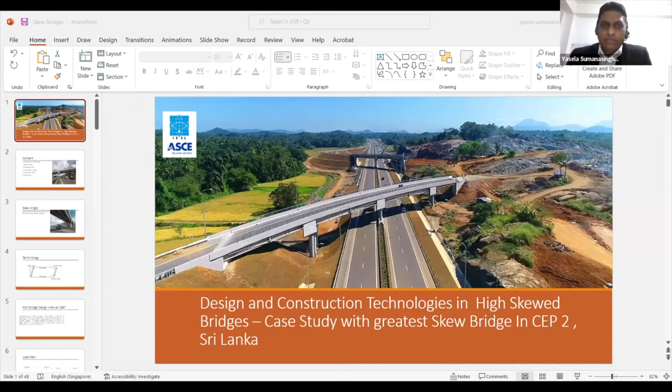Now you see in this photo the Pothuhera interchange, which has two ramps, and these are about nearly 55 degrees skewed bridges, one is ramp A and the other one is ramp D. So this is a system interchange. What do you mean by system interchange is that this is an interchange where one expressway connects to another expressway, but there are no exit or entrance points, direct exit or entrance points, for normal traffic. It's just changing from one expressway to another expressway.

So as we all know, as Sri Lankans, the Meerigama to Kurunegala Section 2 Central Expressway was successfully completed and it's open for traffic presently as well. And Section 3, from Pothuhera to Galagedara, from this interchange point to Galagedera, is under construction, directly managed by the Road Development Authority and local contractors. So that part is ongoing.

So today I'm going to discuss about skewed bridges explicitly, with the case study being the Pothuhera interchange in the Central Expressway project.

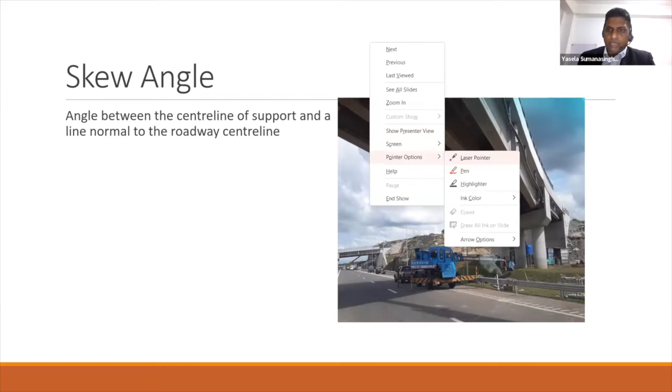So what do you mean by a skew angle in a bridge? It is defined as an angle between the center lines of the support. If you see, check pointer options - yeah, I hope you can see my laser pointer so I can show you what I mean by these terms. The skew angle is the angle between the center line of the supports.

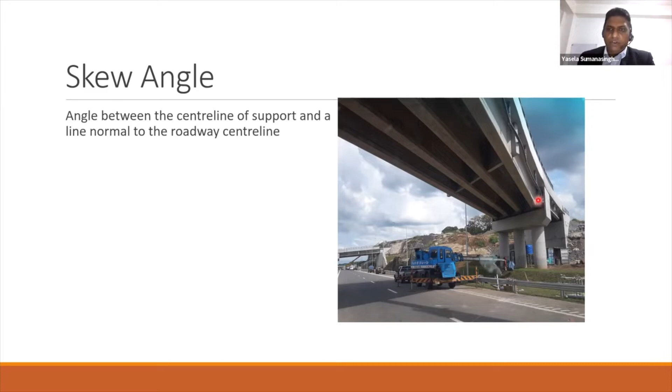This is the support of the skew bridge, and the line normal to the roadway center line. This picture is from underneath the bridge, not from the top. This is the center line of the bridge, and this is the line joined by the supports of the bridge. When you draw a line perpendicular to the longitudinal axis of the bridge, the angle formed by these two lines creates the skew angle.

Now we have a definition in the RDA bridge design manual in Sri Lanka. There is no other local design specification for bridge design other than the bridge design manual developed by the Road Development Authority in 1997. Since there is no other code or guideline other than codes of practice like BS 5400 or Eurocode, we rely on the bridge design manual for local conditions.

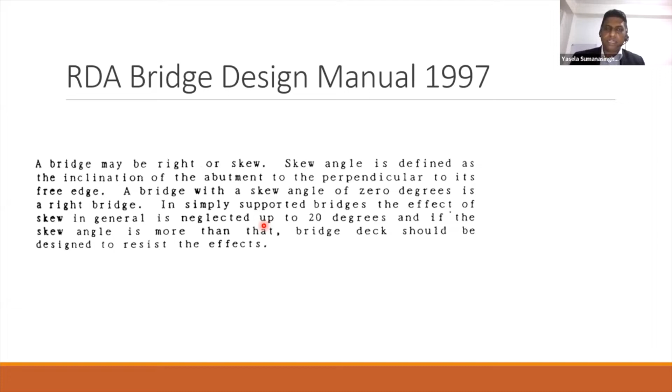So RDA gives this 20 degree limitation. If you look at other codes of practice or design guidelines given by other highway agencies, say UK or Australia, this value is somewhat different - it varies from 20 to 30. Some American standards say it's 30, and Australia sticks to 20. So it ranges from 20 to 30, but in Sri Lanka we stick to the 20 degree margin.

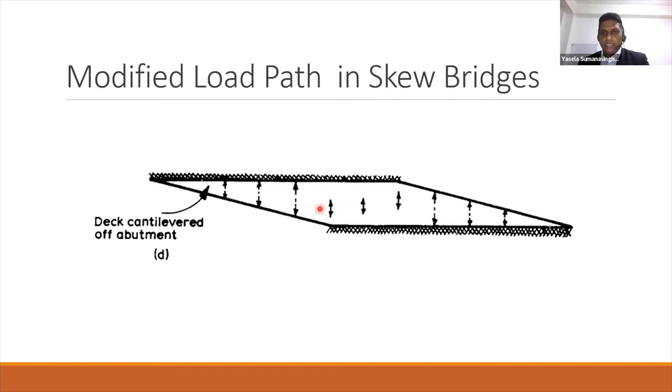Now this is another illustration of what is going to happen due to the skewness. There will be an uplift in the acute corner, and there will be high shear forces at the obtuse corner, and also reaction forces at the obtuse corner. Now this happens due to the load path we have discussed here. So all the loads are transferring to these obtuse corners.

As a result, there will be a high reaction in the obtuse corner, and load transferring to the acute corner is less, so shear forces are less, and perhaps there may be an uplift and lesser reaction forces at the acute corner. So these are the load paths clearly defining what is happening. So if you have a skew deck with less torsional distribution system, you can see that will happen in the deck.

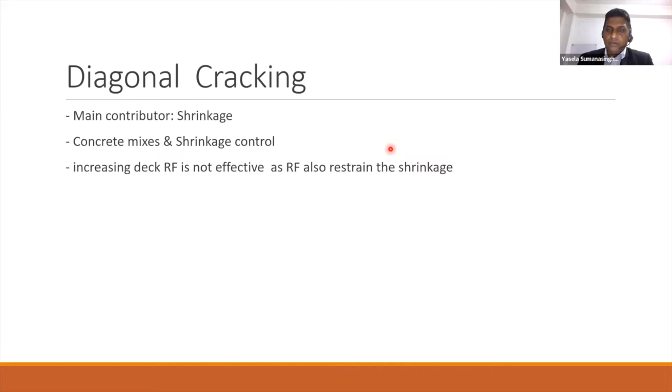The research papers say most of the cracks that appeared in skew bridge decks were due to shrinkage in concrete, the high temperature issues in the concrete mixes. So sometimes design engineers may tend to heavily reinforce these skew obtuse corners and acute corners to get rid of these cracks. But we have to keep in mind that heavy reinforcement also restrains the structure from shrinking. So it acts as a restraint, and there will be cracks owing to that as well. So we have to be a little careful when we deal with the skew effects.

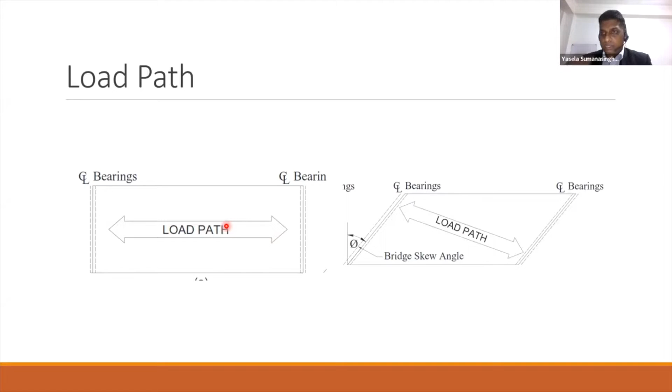If the load path is like this, the girder moments, longitudinal moments, are very high. But when there's a skew, there is a lateral distribution of loads. As a result, the longitudinal moments will get reduced in the girder, but it will increase the torsional effects, torsional forces in the girder. So that's what this number 4 is about. And there may be a possibility of negative moments at the corners as well.

So now, due to this skewness, there are so many effects, as we described: uplift in the acute corner, high shear forces in the obtuse corner, and some lateral torsional effects on the deck, so that there may be large horizontal displacement in the deck. So what does that mean? That means it affects the bearings and the expansion joints.

So with time, you will see the bearings under the girders may be displaced or damaged, and even the expansion joints get damaged, or we have to replace them within a shorter period. Generally, the lifespan of a bearing pad may be about 25 to 30 years, and an expansion joint is again about 25 to 30 years. But if we do not address the skewness of the bridge correctly, we have to replace these, or revisit these places frequently.

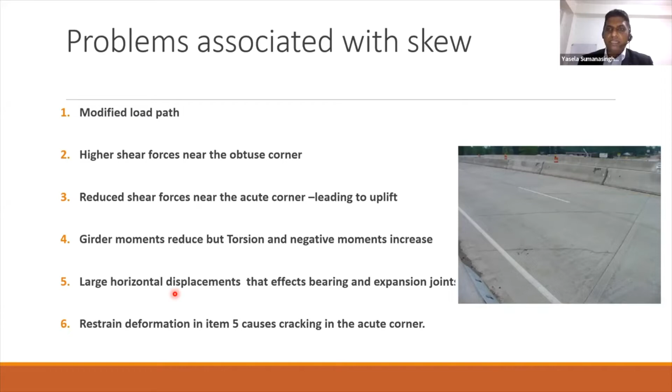So now all these effects depend on how high the torsional stiffness of the deck is. Now what does this torsional stiffness mean? If you take a deck and load it sideways, how much will it transfer these loads to the other end laterally? If there's a high torsional stiffness, there will be greater transfer. But if there's a low stiffness in the bridge deck, there is a low lateral transfer of forces.

So generally, box girder types, cellular decks, and even high depth solid slabs do have a high torsional stiffness, so the effects I described earlier will be high. But if you consider low torsional stiffness decks, such as beam and slab bridge decks, the torsional stiffness is less because all the lateral load goes through the slab thickness, compared to the high depth of the composite structure. The lateral sharing is less, so the skew effects are less.

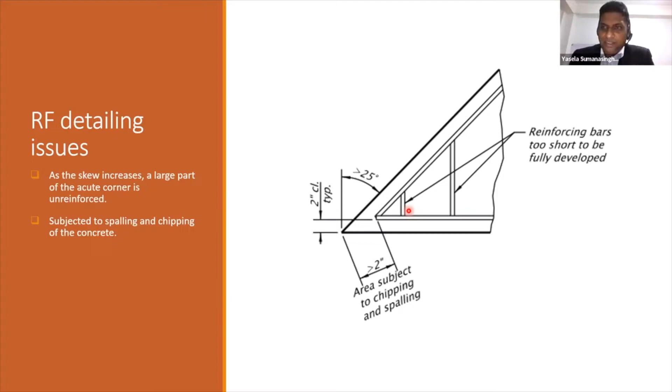And so what can we do for this issue? What we can do is, instead of going like this, we put a break back. We call it break back. So the deck can have this kind of part, so that there are no corners, and there is sufficient space to put the reinforcement, and we reduce the acute corner effects by putting this kind of geometry for our decks.

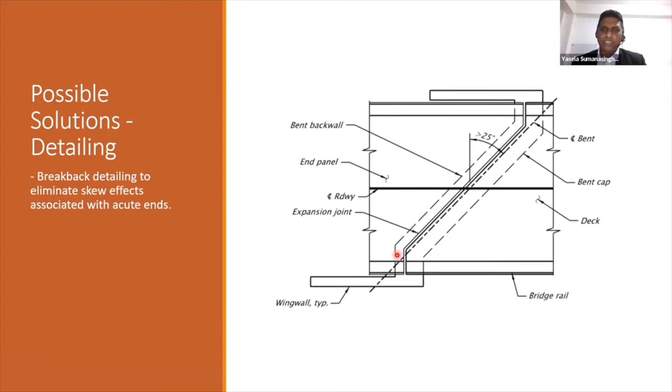So this is the bridge deck, and this is the abutment structure. So we modify our bridge deck like this shape, so that we have sufficient space in the acute corners and obtuse corners to do the reinforcement detail. So that is another way to get rid of this problem.

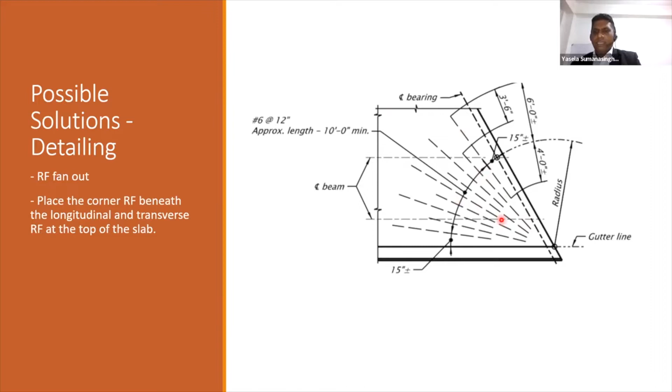Another one is, we put more reinforcement, in such a way that we fan out the reinforcement like this, and we provide sufficient reinforcement radially to cater for those expected cracks. So if we take, let's say, a 3 meter long bar, and we put it like this to compensate all the cracks. So this is another way of detailing.

Then we come to how we place the bridge girders in the abutment structure. So either we can keep the straight square end of the beams like this, or we modify these girders like this on the plan in the abutment. So both ways are allowed. It depends on what you are restrained by at the site. Generally, casting this kind of shape is difficult. This is very straightforward, but it depends how you want to do it.

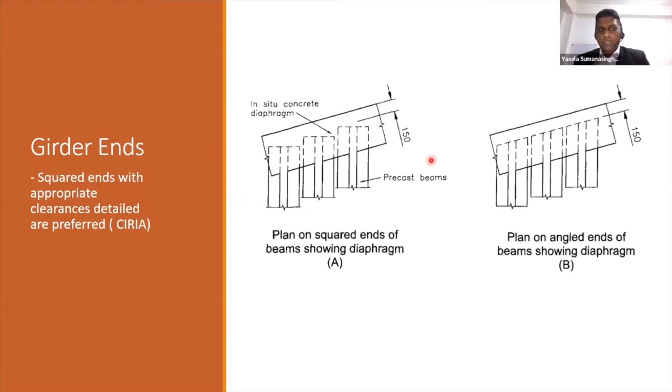To do that, there is a theory called Wood and Armer moments. We can use this because in a skew slab there is a direct bending moment, and as I said, due to the high skew there are torsional moments also. So what Wood and Armer moments do is combine all this and give you the bending moment for the particular direction you want.

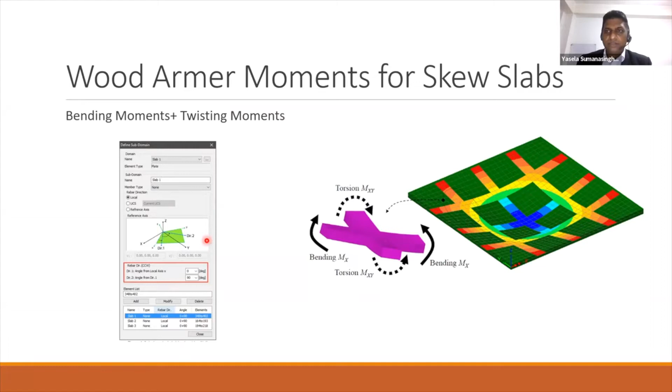In software, we use this kind of interpretation for the direction definitions, and we need to get the correct bending moment for the reinforcement direction we are putting. You can't take the bending moment for one direction and put the reinforcement in another direction. So you have to correctly identify the bending moment for the respective direction, and take account of the plane bending moment and the torsional moment together and put the reinforcement. If you do so, there will be no issue with your deck.

Now, when it comes to the analysis of the bridge deck, generally we use grillage meshes. So if you see, this is the bridge deck, this is a concrete slab, and there will be girders like this. To simulate this, we use these girders, and these transverse elements represent the slabs. One may ask why you can't just model the slab and beam together at once.

The problem is in bridge design you have composite action. First you cast the naked girder, then after launching the girder, you put the slab on top of that, and after the deck concrete stiffens, this acts as a composite girder. So you have to model in such a way that all these effects can be taken into account at different stages. It needs a special arrangement to analyze these decks, so we go for the technique called grillage mesh.

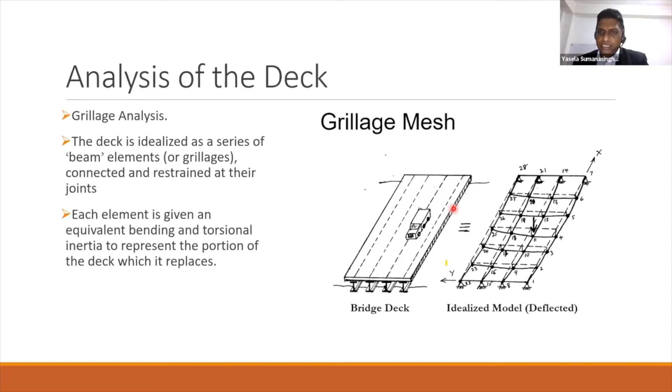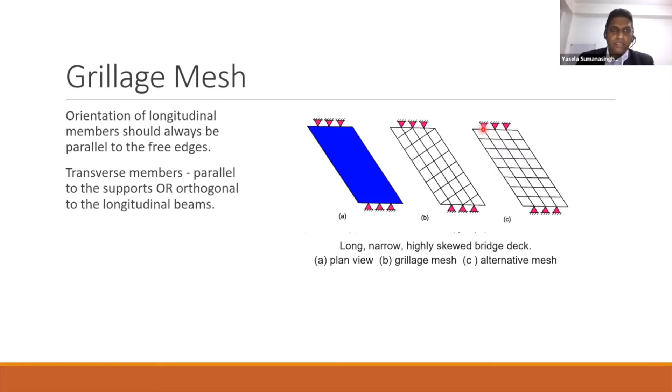Even the grillage mesh we can do in two types. First, if your girder is like this, you put your grillage deck in this way, and your slab is meshed perpendicular to your longitudinal girder. The other way is, you define your girders similar to what you arrange at the site, and then you put your slab transverse elements parallel to the supporting edge. Both ways are okay. It doesn't matter.

So literature shows that for bridge decks with skew less than 30 degrees, you can go for this kind of simple grillage mesh. But if it is greater than 30, you have to model your transverse elements perpendicular to your main girders.

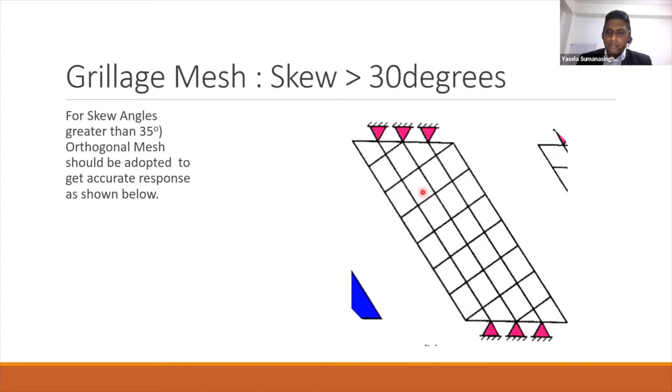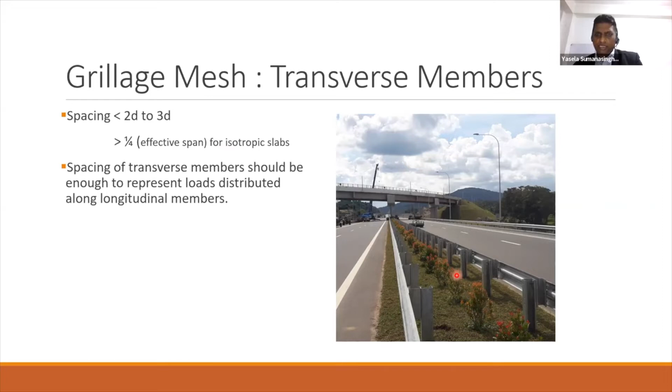And you see a nice picture of again the ramp A in Pothuhera interchange, and this picture was taken just before the opening during the construction. So with that, I complete the tedious part of this design subject, and I'll move into a more general construction topic in Pothuhera system interchange.

So here you will see this is the system interchange, and this is the ramp. We call it ramp A, and this is the other ramp bridge, which we call ramp D. Towards this way it's Colombo. Towards that long mountain side it's Kurunegala. So you will see this bridge when you pass Pothuhera. You will feel how skewed it is, so please watch and keep looking at the details of this bridge when you're traveling along this road.

And this part is still under construction, and these parts have been constructed. Now this is Kurunegala in this picture, and this is Colombo. So when a vehicle comes from Colombo, you take this ramp and you can go to Galagedara. And if you are coming from Galagedara, you can come in this path and join Kurunegala from this ramp. So these are the two ramps I'm talking about.

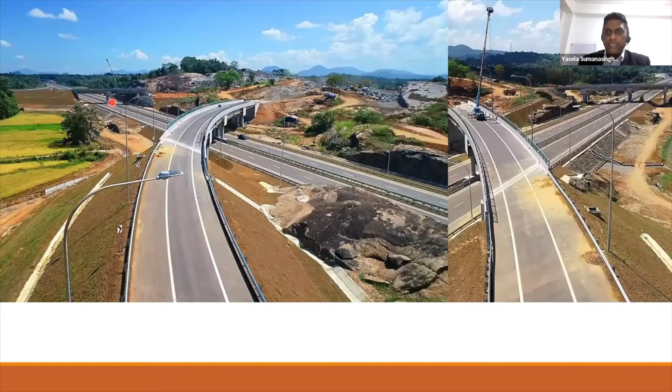This is another picture from the Kurunegala side. The previous one was taken from the Colombo side. So this is ramp A, this is ramp D. This is the part I'm going to take as my case study. This is another nice picture. So this picture is about ramp A, and this picture is about ramp D.

So I have already done a seminar on the Central Expressway project earlier, with the invitation of the Civil Engineering Sectional Committee of the Institution of Engineers Sri Lanka, so I think most of our viewers, engineers and colleagues know about this project. The project management of this expressway was done by the Road Development Authority, and MG Consultant was the leading consultant in association with other local consultants such as RDC, CA, Oceana, CECB, Greentech, and IESL. And the design and construction of this Pothuhera interchange was done by Maga Engineering itself. So these are the main three parties for this project.

Earlier, this system interchange belonged to section 3, but during the construction it was transferred to section 2, that is Mirigama to Kurunegala section, for continuity. As a result, you can now travel from Mirigama to Kurunegala continuously without any hindrance. So we have to praise the project management division of the RDA for taking such timely decisions.

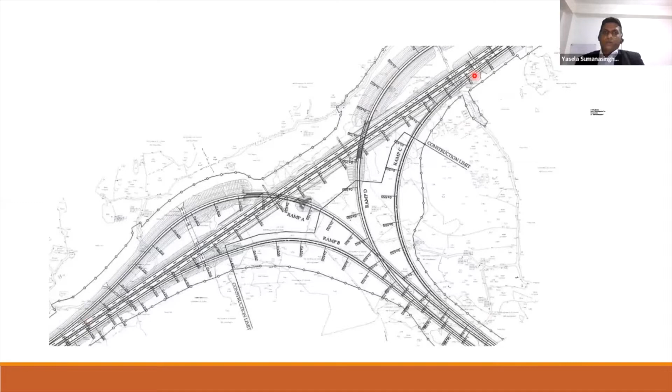But all the main expressway is trafficable, so you can take your vehicle from Mirigama to Kurunegala. So, ramp A of the Pothuhera interchange. So again, I think I am refreshing your mind.

This is an interchange we call a system interchange, where there is no entrance or exit point for general roads, but just moving from one expressway to another expressway, so we call it a system interchange. And this is the ramp A interchange. It does have

30, 2 x 35 spans, and a single 30-meter span and 20-meter span bridge. It's a combination of 20, 35, 30 span arrangements. And since this is a ramp, the width of the ramp is a little less, so only 4 beams were used in the cross section to build this ramp.

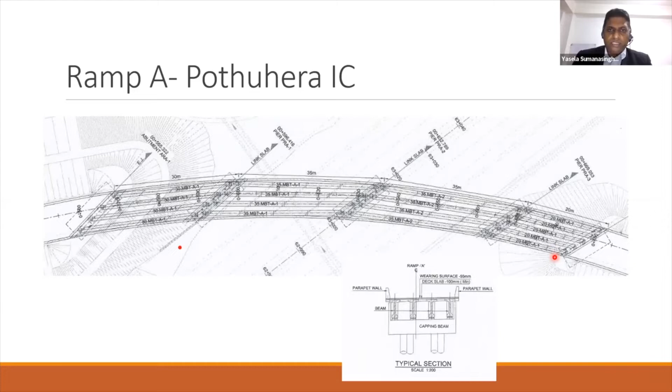So this is another longitudinal view of this bridge ramp, where you can see the 30-meter span, and this is a 35-meter span. There's a 35-meter span and 30-meter span and a 20-meter span. Sorry, 20-meter span. I think this has to be corrected.

So why we use 2 x 35 spans here is because of this road. We have to allow this traffic. So we have limitations, so we have to use the greatest length for this span. Now, when a bridge is curved and we use simply supported girders, it is very easy to use smaller girders and get the curve.

But when these geometric constraints are there, we have to adapt this kind of longer beams. So we have managed to do this bridge on very short notice due to this arrangement.

If I describe a little bit of the history of this one, as I said, this was originally to be done from section 3 of the Central Expressway, but since we were given this task to build this system interchange on short notice, we had to change the designs. Earlier it was a box girder,

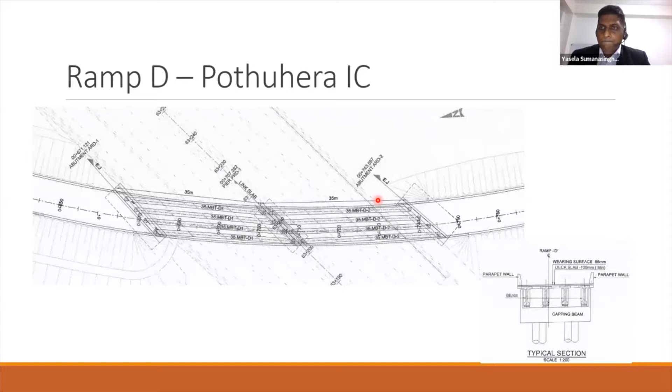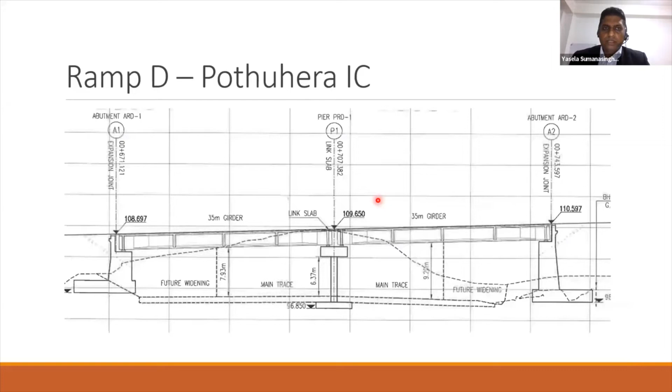Again, this is a cross section of the ramp D girder. So what we are using here is pre-stressed concrete girders. If you see, we use pre-stressed girders, PSC girders, and on top of that there will be a slab.

So for this system interchange, as I said earlier, there are 20, 30, 35 meter lengths, and we use grade 40 and 50 girders. And for continuity, we use link slabs. So we use the minimum number of expansion joints in the bridges, so that you don't feel any discomfort while you are riding.

To make sure that you get a comfortable ride on the bridge, we use only 2 expansion joints, at the start and end of the bridge. Other than that, there is no intermediate expansion joint in the bridge.

Here you put a link slab. This is one deck. Now this is 2 ends of the supported bridges, with girders, and this is the diaphragm wall. There are two girder decks casted here, and in between we put another slab.

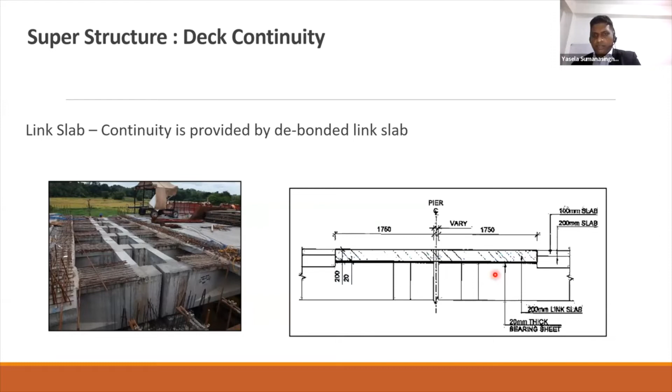So we don't join these decks by an expansion joint. Instead, we put a link slab and make sure there is no expansion joint in between, because that discomforts the ride and also gives maintenance issues. More expansion joints mean more maintenance problems, so this is both for riding comfort and maintenance purposes.

We have considered robustness and redundancy issues here, because we used smaller diameter columns, since we can't take larger columns due to the restriction of the two sideways. We made sure robustness and redundancy were taken into account when deciding the number of columns.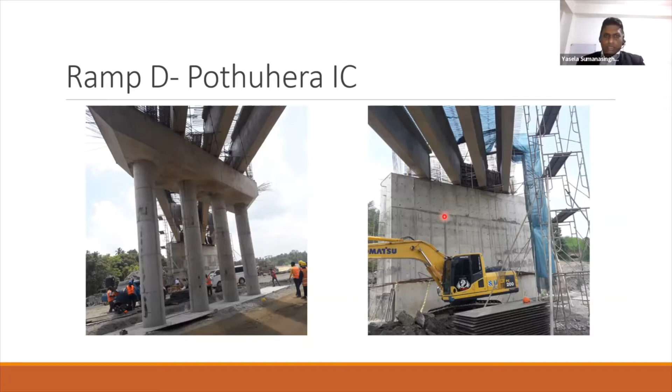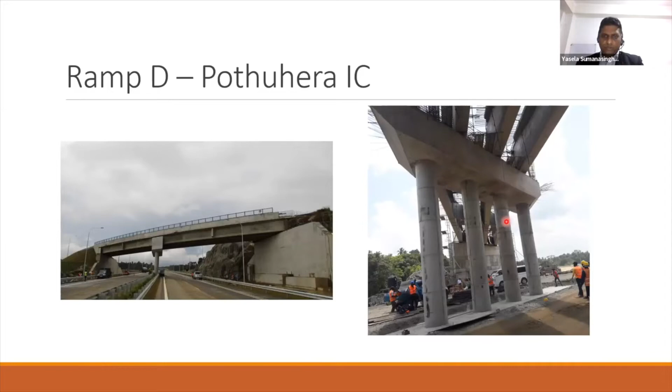This is another illustration of the ramp D, and right now you can travel underneath this bridge while traveling from Mirigama to Kurunegala. This is another picture of ramp D during construction, showing how skewed these piers are, and these are the diaphragms.

So again, now I will talk about the deck systems we have used. This is the girder, the naked girder. After launching these 4 girders into the substructure, there's an intermediate 200 millimeter slab connecting these 2 flanges.

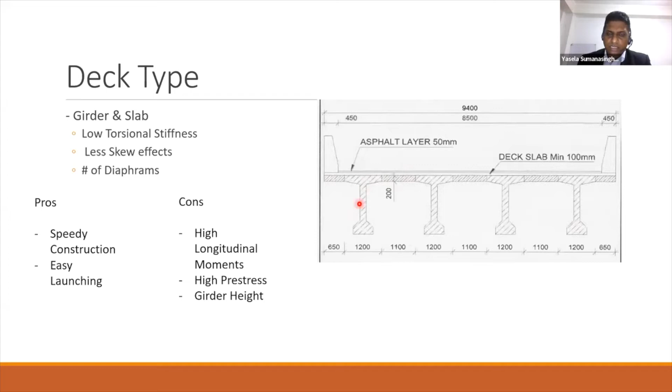If we talk about construction stages, first we launch the girders into position, then we cast the diaphragm walls in between the girders, then we complete this 200 millimeter slab.

This is the first composite action. Then there will be another 100 millimeter thick slab on top of that. This is the second composite action of the girder. So there will be 2 composite actions at different times, and during construction we have to account for these effects in the detailed design.

As I said, we adapted a very low torsional stiffness deck type, minimizing the skew effects. We also decided the number of diaphragms to give the minimum effect to the skew effects. So what we've done is limit the transverse dispersion of the loads, and that's how we get rid of the skew effects.

The good part of this is it allows very speedy construction and easy launching of girders. So what is the bad side? Design-wise, this girder gets a high bending moment, high longitudinal bending moments. As a result, you have to introduce high pre-stress, and even go for a greater height of the girder.

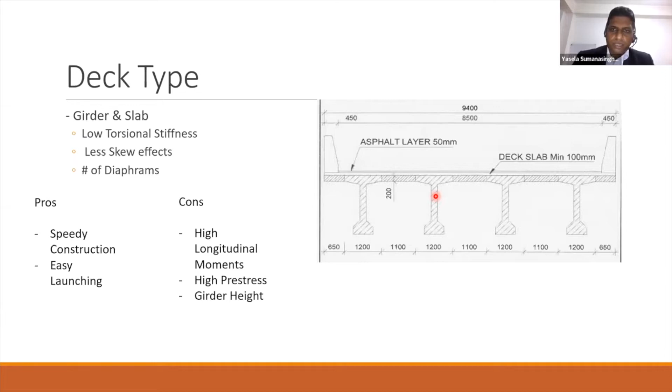So this is a single span of a 30-meter girder. I took this picture to explain the number of diaphragms we adapt. There will be 2 end diaphragms in the 2 corners, and a mid diaphragm. The mid diaphragm is parallel to the supporting edge, which also makes it easy in the casting of the diaphragms.

Earlier we had used 5 diaphragms for our bridges, with other systems allowing greater lateral dispersion. Since this is a skew bridge, we minimize the lateral dispersion, and that helps us overcome these skew effects.

This is a longitudinal section of a 30-meter girder. You see the girder and the flange part, and at the corners there's a concrete block to withstand the high end block forces from pre-stressing. In the middle part there's only a thin web, and this is the diaphragm section. So this is the type of girder we have used, and these are the pre-stress tendon profiles used to do the post-tensioning.

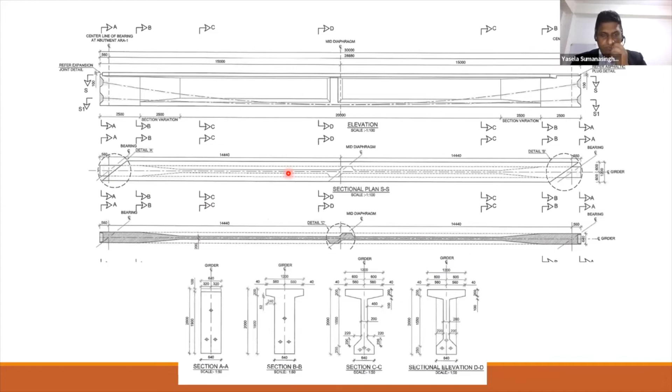When it comes to the bridge bearings, we always use the elastomeric type reinforced bearing pads. What elastomeric reinforced means is that steel plates are in between the rubber, and these steel plates reinforce this bearing. As a result, it will take more compression and shear strain, withstand more compressive strains. These are the types of loading the bearing pads have to resist, so we used this kind of bearing pads.

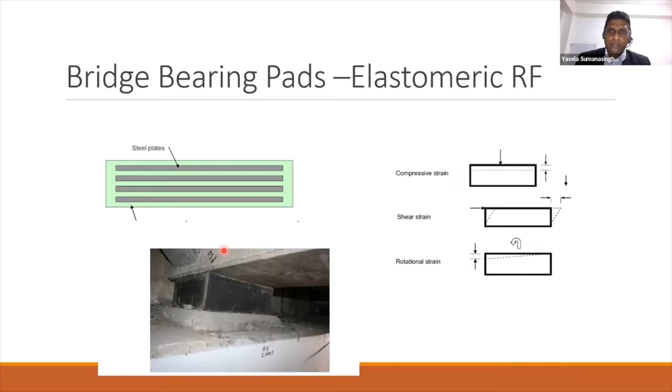Now with the designs, we did several modelings of this one. Contractors and designers have done different models, and we, the consultant engineers, did our independent models to evaluate this. We made sure that all our design calculations are similar and we get the same results, converging on this.

As a result, in a very short period of time, we made our checks and balances very hurriedly, but we made sure that all the stuff was done in a quality assurance manner. Other than checking the designer's model, we built our own models and had our own spreadsheet to check this design. So it's like an independent design checking.

We made sure we wouldn't find any blunders in our design, because I have to make another point here. Unlike usual practice, we didn't have any specific period for design. The construction and the design of this project were done simultaneously, at the same time. There's no specific phase called the design phase—it started from the very first day. Design and construction started at the very first day of the project.

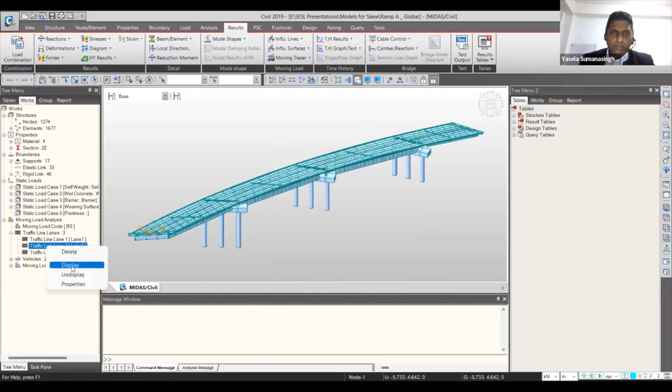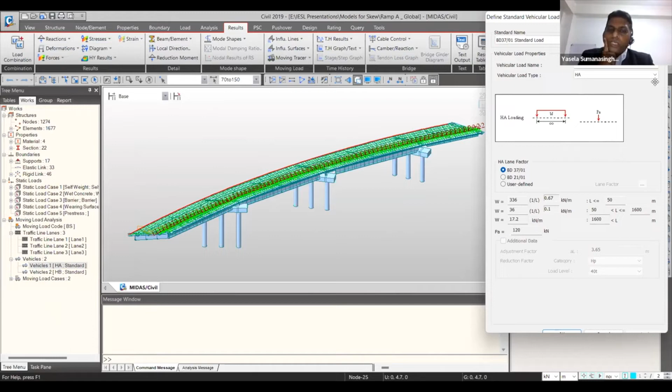So these are the traffic lanes we have introduced. There are three traffic lanes, and there are HA and HB vehicles here. So these are the HA type. If you are a little bit familiar with highway loading, we did this design per BS 5400 Part 2, 2006 version, and as per that, the HA is defined.

What happens? I think I had a problem. Just give me a small second.

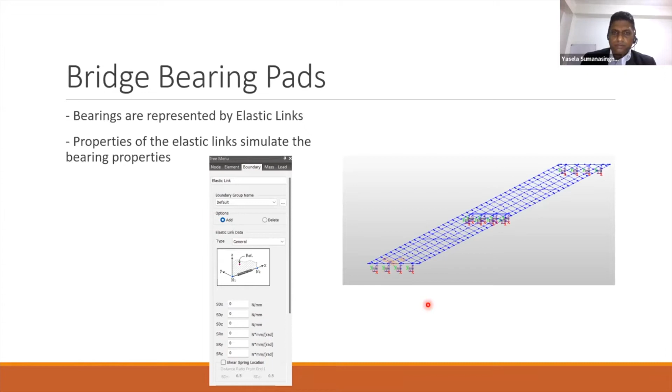So, as I said, we have used the same kind of bearing pads in the project - reinforced elastomeric types of bearings. Of course, there are different sizes and dimensions, but the concept of the bearing is the same: elastomeric reinforcement.

But here, as I said, there will be significant displacement deflections in the expressway due to the skew bridge, so we made a small adjustment. We introduced a small L angle to hold these bearing pads in position. Otherwise, with time, traffic loading, and even temperature and shrinkage-creep movements, there will be displacement in the bearings.

To overcome that, we hold these bearing pads tight at the bottom. But when you do that, part of your bearing pad becomes not effective, because it's restrained - it doesn't allow complete involvement in the movements. So we have accommodated these kinds of things in our bearing designs.

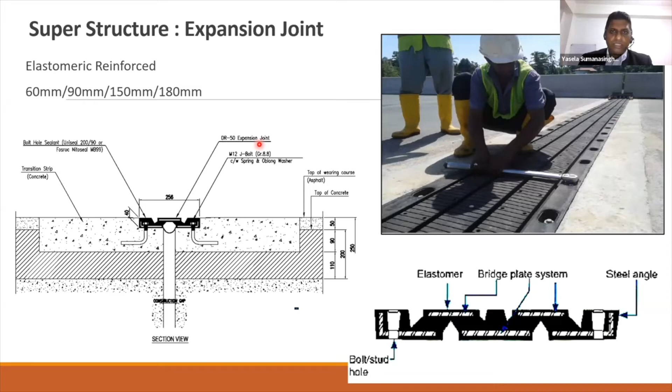But again, due to the very high level of lateral movements expected, we couldn't use this expansion joint. Instead, we introduced modular type expansion joints, allowing for the lateral and longitudinal movements of the structure.

So this is the special type of expansion joint we use for these superstructures. Special, I mean, these are very common in the world, but in this project it was special because all the general types were elastomeric reinforcement type. Modular type bearing expansion joints give more freedom for movements - they allow for greater movement, so we used this one, though it's a little costly as well.

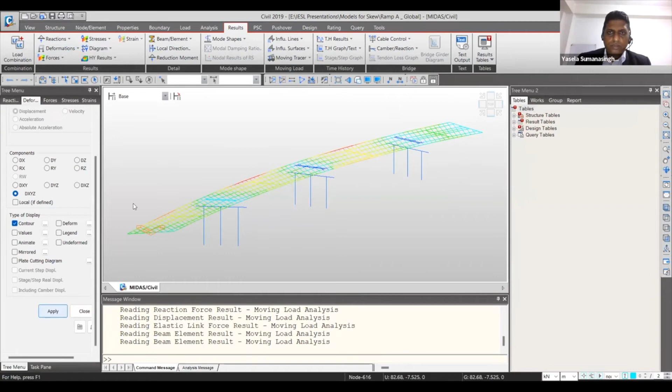So, as I said, this is the global model, and these are the expected deflections available now in the global model. But this is not the accurate deflection pattern - we have to consider it part by part, factoring in all the shrinkage and creep effects. In this global model, that has not been done.

This is the basic modeling for road traffic, and we can get the deflections due to road traffic and the restraint condition for this girder and bridge, and we can get the moments for different load combinations, and so on. So the time-dependent forces due to creep and shrinkage cannot be evaluated from this one.

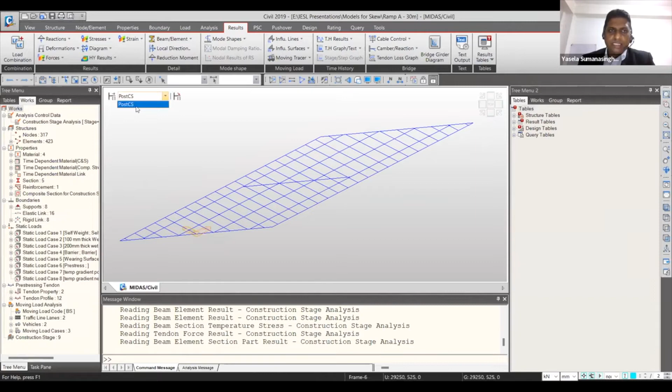So now for the construction stage, we have done a separate model for each and every span. Now if you see, we have done the construction stage modeling. This is the naked girder - we have done the casting, and we have done the pre-stressing. Due to pre-stressing, there will be deformations.

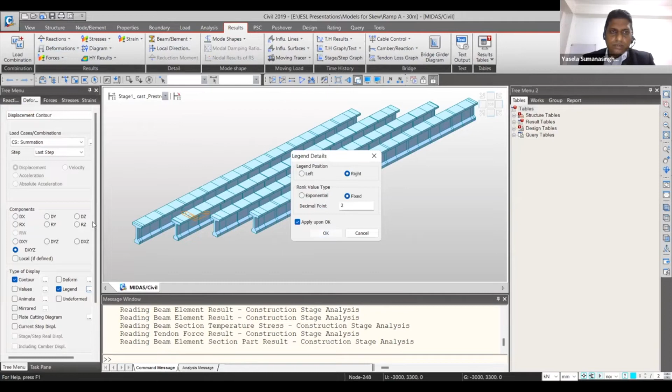Like that. So if you see, these are 50 millimeter. Due to the pre-stress, there will be an upward camber, and the estimated one is 50. So now, when we are doing this one, we have defined all the creep and shrinkage coefficients. So if we see, we have done this one for grade 40, and this is the time-dependent creep effect, and this is the graph. So we introduce this graph, and the computer will automatically take all the creep effects into this model. Or otherwise we can do it by manual calculation also.

So what we have done is there are, I would say, three kinds of checking. First one is from the contractor designer itself, there is a checking. Then we do the checking of their model, and we do our own model. Consultant will do all models using the software, and we make sure that we have a separate spreadsheet designed for this time-dependent force evaluation. So we make sure that our spreadsheets and the software give the same result, within reasonable tolerance, so that our designs are super fast, but very correct as well.

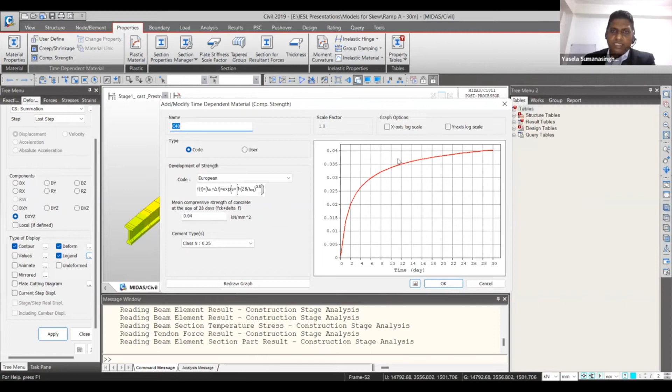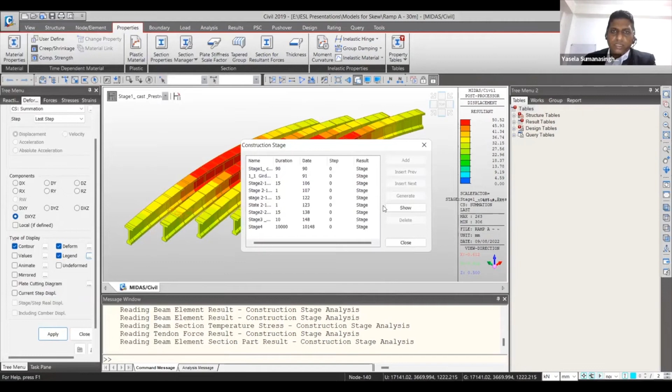And this is the grade 40. We have to define these graphs. This is the compression with time as the concrete achieves the strength. So if you see now, just after the casting, within 3 or 4 days, we do the pre-stressing. Within 7 or 10 days, we do the pre-stressing. So we have modified our construction stages in such a way that now this is the first stage, cast and pre-stress, and

after getting the compressive strength of your casting, we do the pre-stressing, and then after another about 30 days, we do the launching, and then another 15 days we do our diaphragm casting, and then we do the 200 millimeter thick wet concrete between the flanges, and there is a wet concrete, and after getting

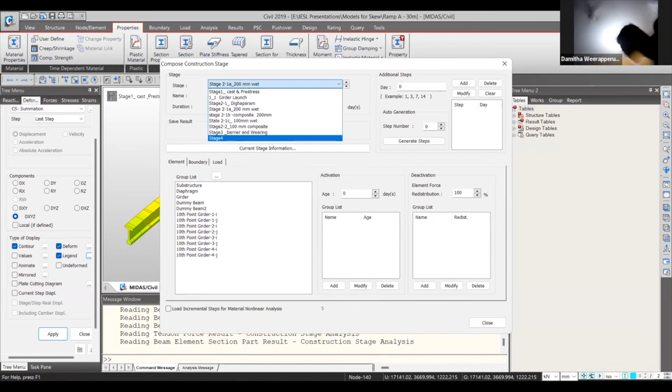Can you please check your mics, because I'm getting some disturbances. Can we mute this one? Engineer Pragit, can we mute that mic? We can't mute. Dear participant, can you check your mic? We are getting some disturbances. Engineer Damitha, can you please check your mic? Engineer Damitha, can you hear us?

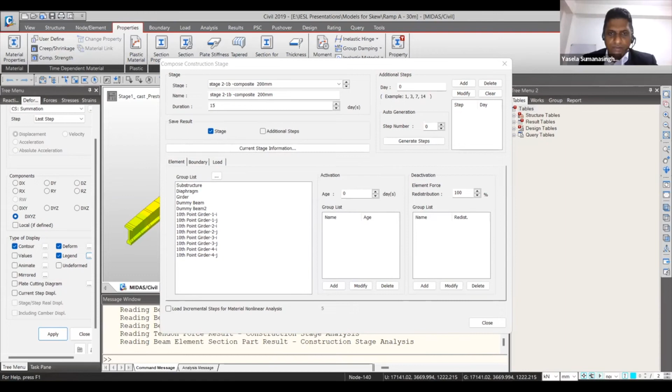Okay, so anyhow I will continue with this one. So once you get the composite action, then there is another concreting, 100 millimeter wet concreting. It will take another step.

Yeah, hello. Excuse me. Could you please everyone mute your mics?

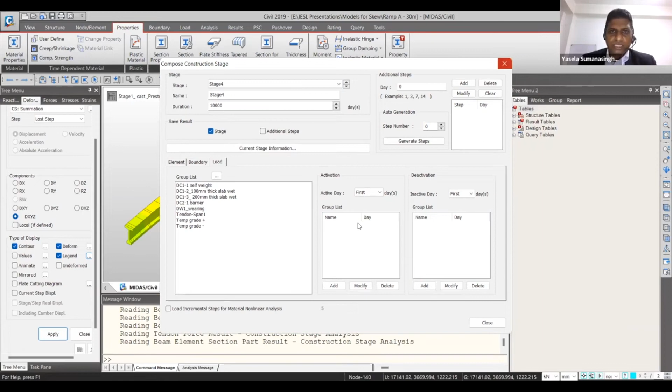Okay, thank you. So the last stage is the construction of barriers and putting the wearing courses. So that is also done, and in the final stage we allow about another 10,000 days to allow full creep and full shrinkage effects, so that all these construction stages are incorporated into this model.

And with that, after pre-stressing, this is the deflection. Now, let's say within another 30 days, there will be different deflections when the launch is there. Then with the casting of diaphragms, deflection is reduced due to this weight and load dispersion. So like that, we have to check all these deflections, and before the concreting and before the asphalting, we check these deflections theoretically, and at the site we also check manually.

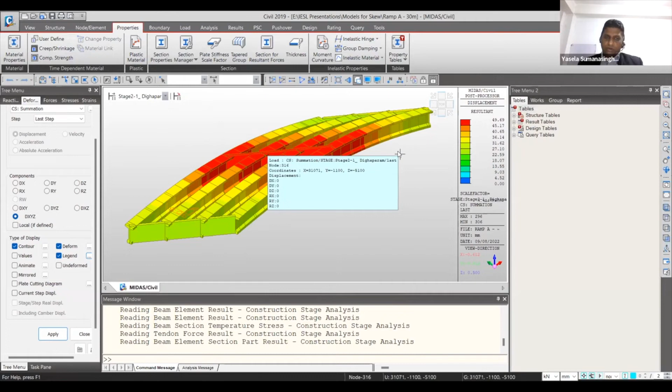So we make sure that all these deflections are in the same region in the theoretical as well as the calculation. So ultimately there will be no sag in the deck, and if there's a sag, there will be water stagnation on the road, and during the rain it will be pooled, or there will be a small water film on the bridge. With high speed, these small water films are very dangerous.

It will skid. So we'll make sure that safety of the traveler is there, which is very hard, given a very high level of design checks during the design as well as during the construction. So when it comes to expressway designs, this is one other aspect which we have to do compared to other road structures, where we have to be very careful about stagnation of water and water films on the bridge, or even on the normal highway expressway surface, so that no accident will happen during the rain time.

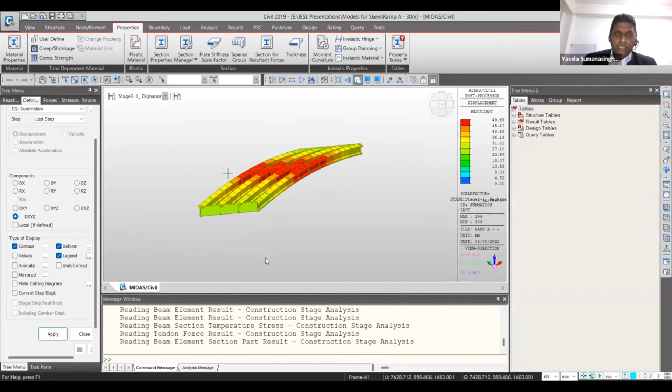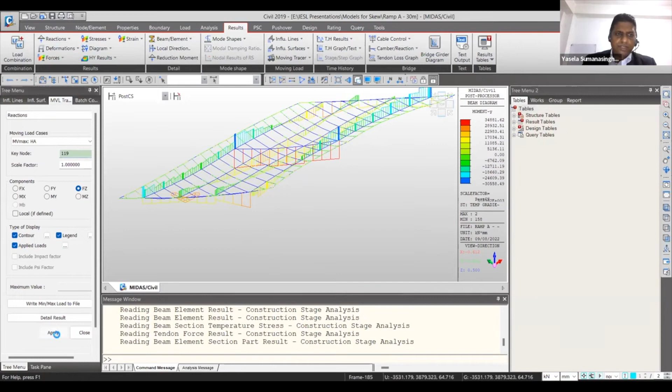So these are the local models we have done, and ultimately we do the final design, and this is the final design shape, and we even get the bending moments for this, and we can get what the load is now. If we want to know the critical loading for this critical beam, we can check that one.

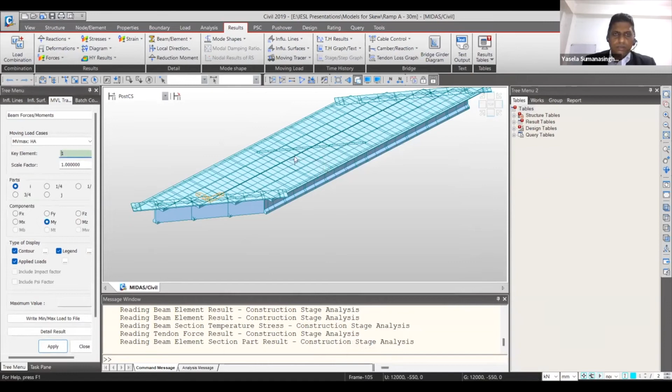So if we want to get the maximum bending moment here, this is the typical moving vehicle loading. So this is the KEL, and this is the uniform load. This is BS5400, and this is completely different in the Eurocode. This has been done for BS5400 2006. So we can get even the HB type. To get the maximum moment at this point, this is the HB loading.

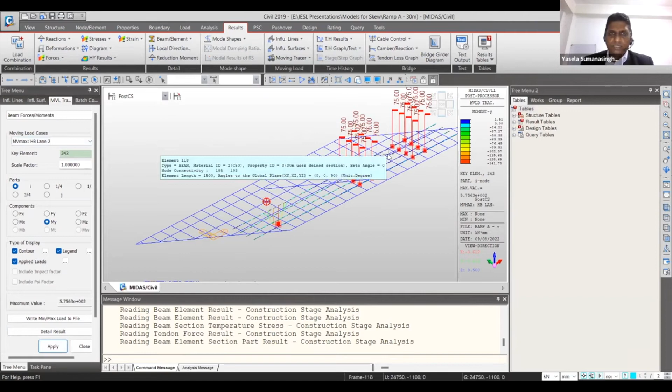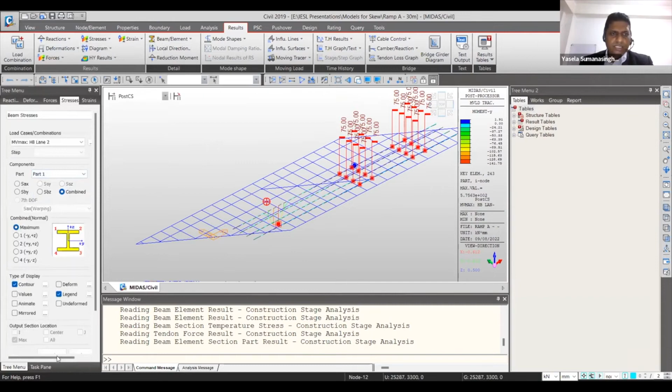So many things can be done with these sophisticated softwares, and nevertheless, it's always good to check with your manual calculations or a spreadsheet as a designer. So now you can get the stresses and check all these stresses. You can calculate stresses anywhere and check whether these are in line with the design specifications, and with time these can be checked.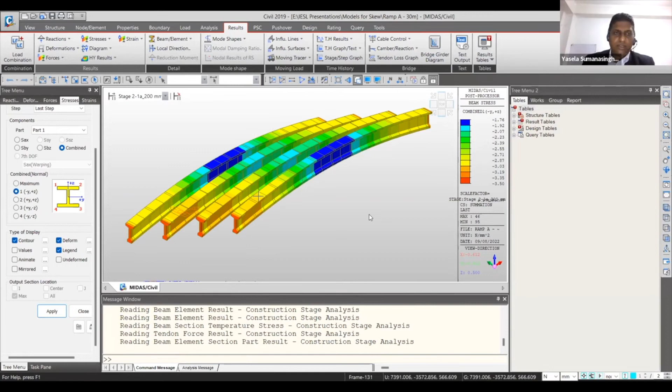So our life has been made easy by these softwares, but nevertheless software is a kind of thing where you give something, you get something out, and you don't know what happened inside. So it's a very good practice to check this by doing your manual calculations. And so this is ramp A. I will go to ramp D also. So this is ramp D.

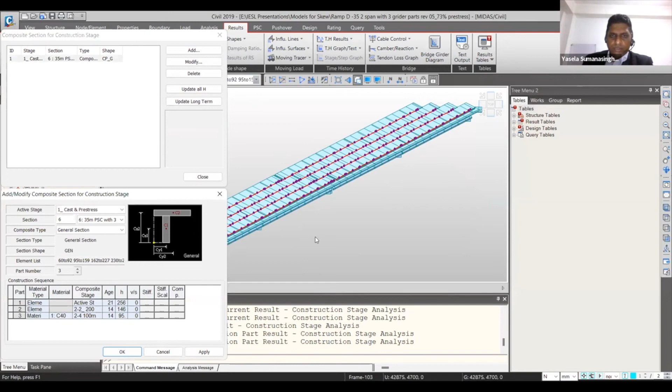So this is another local model we have done for the 35 meter girder. And as I said earlier, this girder has composite action in 2 parts. So we have to introduce that composite action into these girders. So first the naked girder, then there will be a 200 millimeter flange, and ultimately a 100 millimeter thick slab. So all these have to be incorporated into the design so that it will give the results.

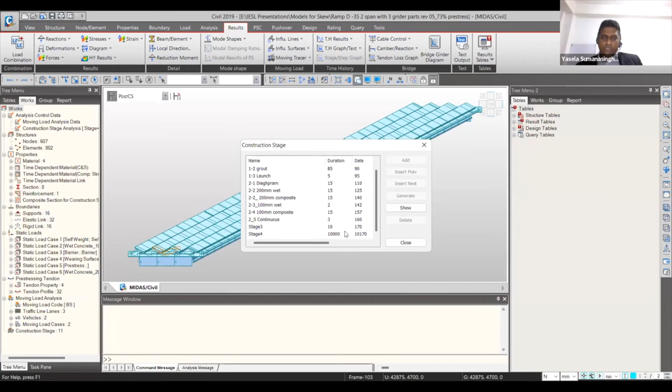Again, there is a construction stage for the casting, grouting, launching, diaphragm casting, and 200 millimeter deck concreting, and this is the composite action of the 200 millimeter. Then we have to do the 100 millimeter deck casting, and there will be composite action, and after that we are allowing for the complete creep and shrinkage to be delivered. Let's say it's 10,000 days. So all this is checked.

And these deflections we can get. So these are the deflections. It will go like this, and the diaphragm casting is there. And finally the post construction is there. We can get the bending moments, and we can even get the stresses at each stage.

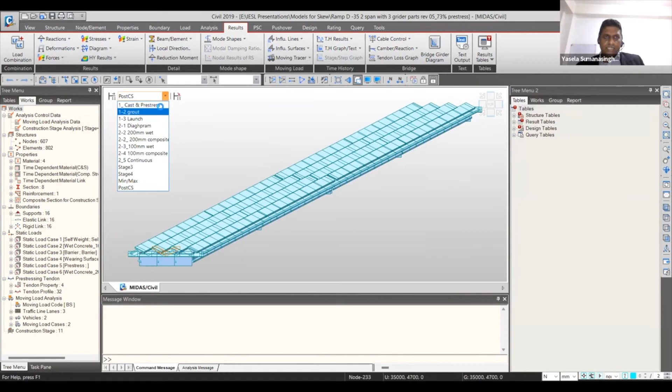So these are the stresses at the bottom just after the pre-stressing, and these are the top pre-stresses. So we can check all these limitations. So these are the type of checks we do, and very easy to check once you model it. However, as I said, we do the manual calculation, I mean manual calculation by our tested and verified spreadsheets, and we make sure that our modeling and the calculations are uniform and checked.

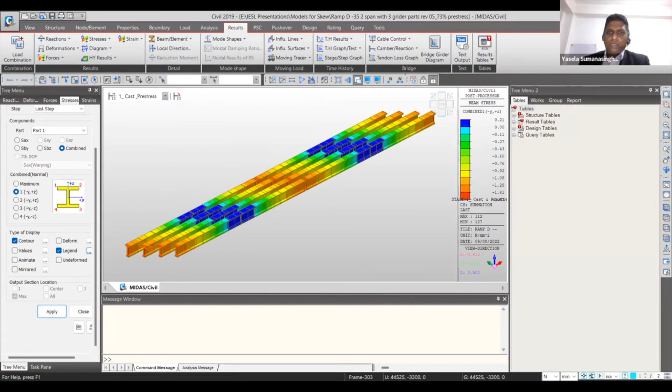So as I explained, we can get the displacements and deflections for all these designs, and with that I move to another part. Now this is substructure design for a skewed bridge. This part is not applicable for our prototype designs, because we allowed our superstructure to breathe. That means with the creep and shrinkage and all the highway loading movements, this bridge superstructure can breathe. It can move because of the bearings.

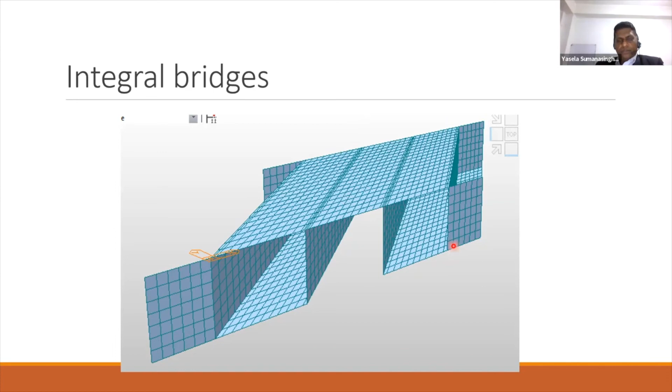But if we are not providing the bearings, let's say integral bridges, with the abutment wall and the deck cast in monolithically, there will be no space for this superstructure to breathe. So whatever the deformation, it will transfer to the substructure. So in that kind of structure, when you do a skew bridge analysis, you have to be a little careful. Now this is a plan view of such a skew type of structure. Due to the skewness, it will rotate around some point here. So when it rotates, you have to be very careful in the substructure design,

because there will be active soil pressure and passive soil pressure. If it is moving in this direction, this soil part is in the active stage, and since there's a little more movement here, this part is passive pressure. Again, this part is active, this part is passive. So just because you adopt active pressures in your substructure, it doesn't give the correct results if this is the case. So you have to be very vigilant in your design.

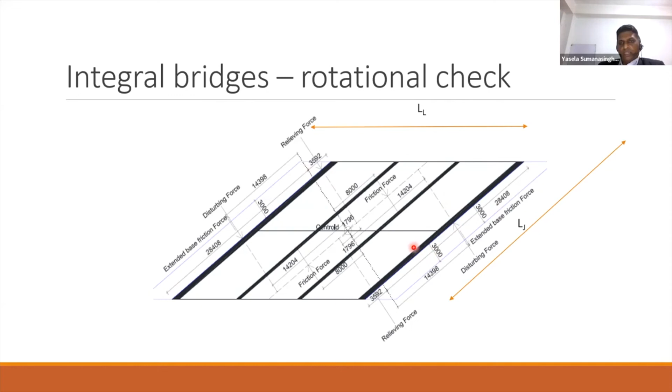Different guidelines give different parameters to check this one. I think this is extracted from the DMRB guidelines, the previous guideline for design of box structures from the UK Highways Agency. These may have changed for the Eurocodes.

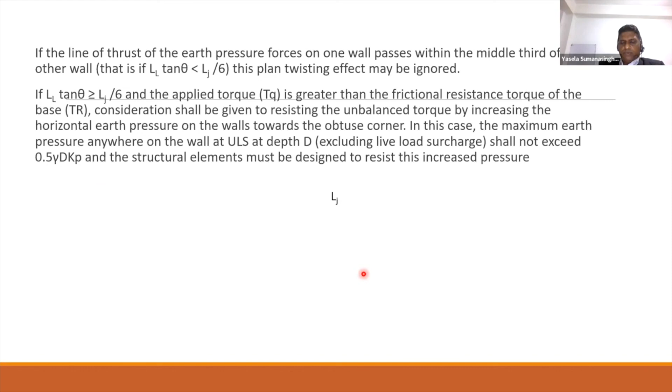With that small note, I would like to conclude my presentation. I think I was able to give you something to think about in what we have done in the Central Expressway designs and in our design practice. With that, I will hand over the mic to Engineer Prageet for the conclusion.

Thank you, Engineer Yasela. We spent, I think, more than 1.5 hours absorbing the knowledge and experience about the construction technology of skew bridges in Central Expressway section 2. Now we have allocated some 5 minutes to ask questions. If you have any questions, you can use the chat box, or start now.

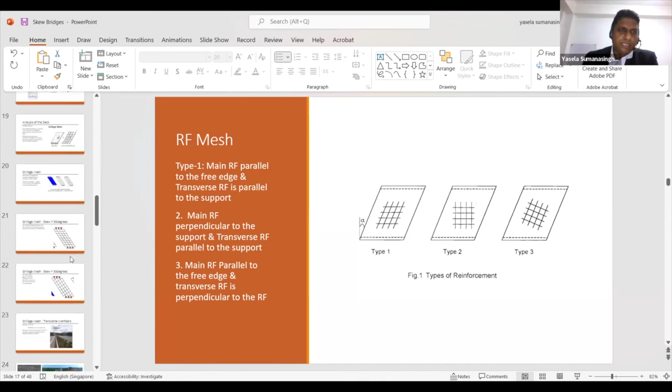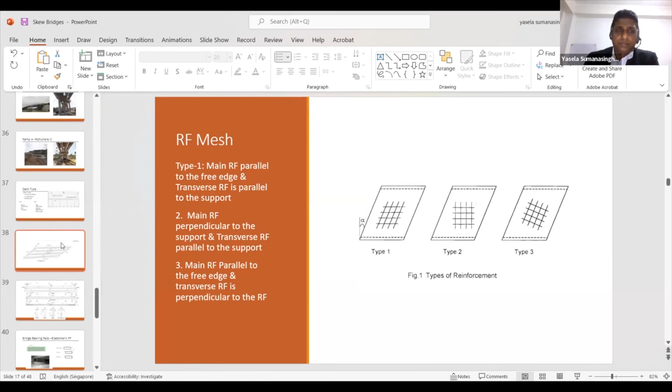And there are other aspects, like how this will affect specific types of bridges, let's say with different kinds of bearings and different kinds of superstructures. Another criterion is bridge articulation, how the skewness affects it, and you can do some research on that. Another thing I can think of is deck types. You can consider the deck types.